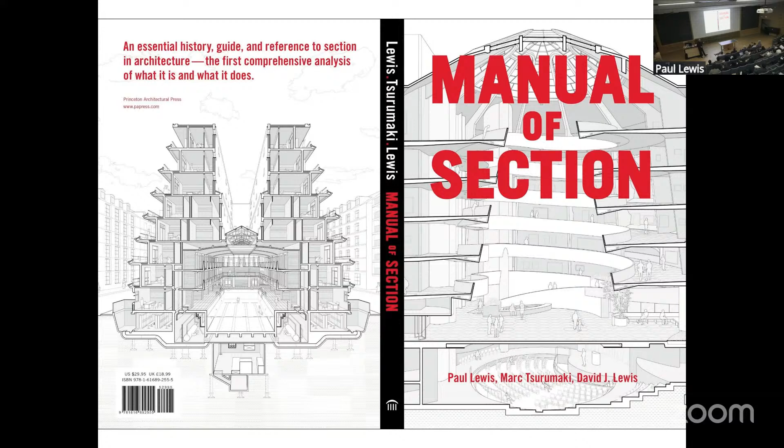And we also wanted to find a way that we could actually develop a kind of language or framework or a typology, if you will, of sections, so that when we as critics are involved in discussions, hopefully the level of conversation of the crit would rise above simply saying, you have a good section or you have a bad section, but what qualifies and what differentiates a section? Why do we claim that a particular section is interesting, and why do we claim certain sections are uninteresting?

In the process, we explored ways of looking at buildings through a combination of section and perspective. We really like the fact that it both looked at an abstract cut, something that was invisible, the measurable section through a building, but at the same time also allowed you to inhabit the view through the perspective. So it was both abstract and embedded at the same time.

It was painful to do these. It's very time consuming to do these drawings, but I think it's been a fruitful book, and it's been translated into I think 6 or 7 different languages. So we've been really pleased with the impact this manual of section has had.

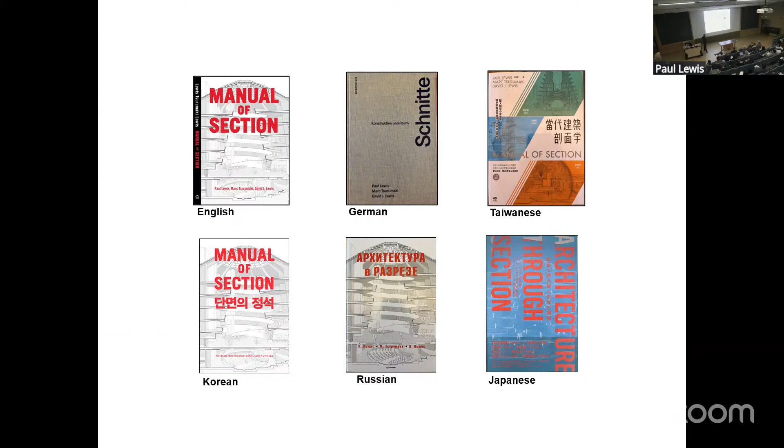I would argue that our more recent book, Manual of Biogenic House Sections, would actually be a more important book, in part because we moved into the question of the materials that are used to produce buildings. And particularly in the light of climate crisis, in the light of a crisis of toxicity, one way that architects can engage this issue is through the specifics of materials.

And so in some respects, we see this as a kind of paradigm shift away from 20th century modernism and its material basis. The book is structured according to 10 different chapters, 9 of which are bio or geogenic based, and the last one is reuse. And I'll start actually with the reuse because in some respects our office has always been involved in reuse.

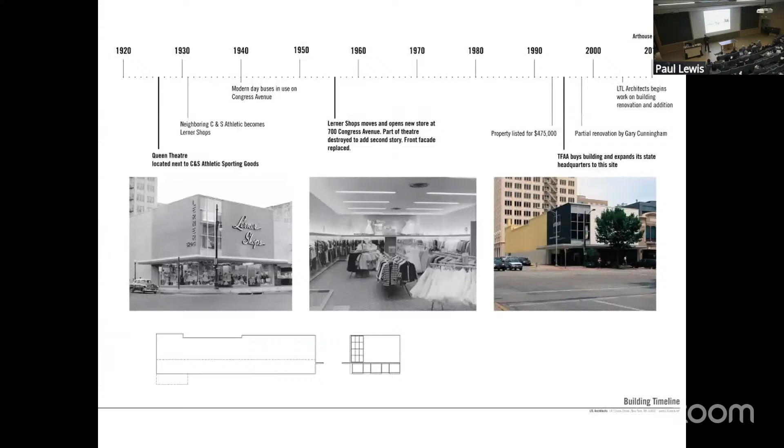The cliche with reuse is that the most green building is the one that already exists. I think it's a perfectly good cliche, but more importantly, it allows you to do other things. The act of working with an existing building is super interesting. It allows you to take a building that might have been, say, a theater that was then turned into a department store and now being reused as a contemporary art center, so that the trajectory of the design in effect affects how you go about even engaging with it, right?

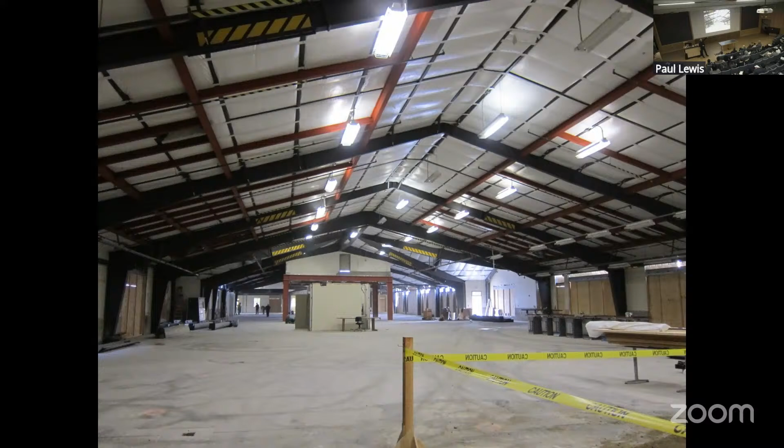Another project in California, we were asked to look at a maintenance building and convert it into an open office space. We would never develop an office building that would have this kind of column-free space. You just wouldn't do it, right? But this was the plumbers area. This was the area for the maintenance workers. This was, in a sense, all the trades that the university used to house on campus that they realized they no longer did because it was cheaper to actually go out and get them from outside of the context of the university.

But we were able to take this building, which was only about 10 years old, and reimagine it and take advantage of the fact that it has this column-free structure to deal with this new diaphanous ceiling. We perforated the whole ceiling with skylights so that it essentially had an atmospheric effect. Again, only a product of the fact that it wasn't a ground-up building, but in fact, reusing an existing building.

Or a museum in New York, Poster House, which was this through block space. But because it had to be a climate controlled museum, we in a sense had to do a building within a building.

This building was over 100 years old, so it was quite porous. There's no way it was going to have the humidity controls we wanted, but we didn't want to lose the quality of the space that was already there. So in a sense, we built a building inside a building.

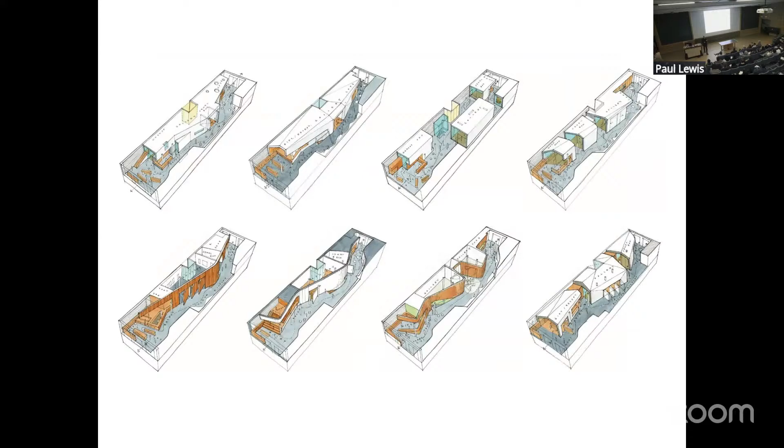The gallery was controlled. We went through all kinds of diagrams for how we might do that kind of ship in a bottle, and ended up with a much more simple version where we thickened the zone where we wanted the gallery and thickened where the public entry would be, and then started to look at some very simple geometric moves to sculpt that form so that we could end up with these two long lines that crossed the full block of the building and intersected precisely at the gallery entry.

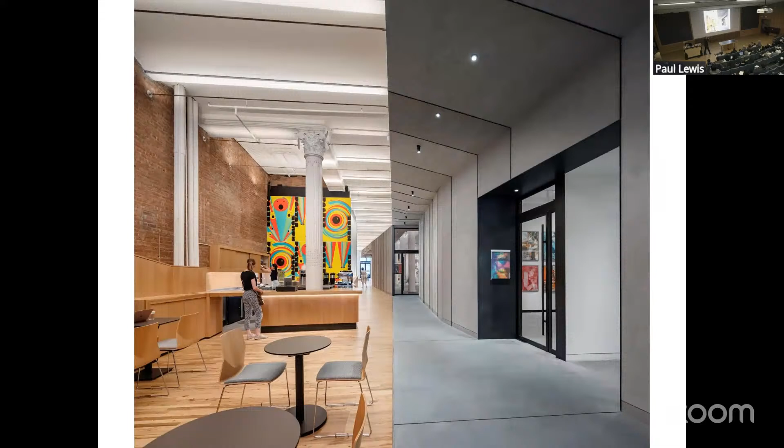Opposite this building within a building was a very long 230-foot piece of cabinetry that had to actually slope about 3 feet from 23rd Street down to 22nd. And so you end up with a project that almost feels like it has a split screen. On the right-hand side is the new building. This is all clay-based plaster. And then here you have the existing building that this is positioned within.

You still get these interesting transitions over that line. So here the seating, which actually is adjacent to where the coat room would be, transgresses that line, or the cafe is visible on one side. We like the idea that you would still maintain the presence of a promenade or a street, because a poster's natural habitat is the street. So why don't we hold on to that? Let's just keep that there, but still maintain the ability to have a gallery with full humidity controls.

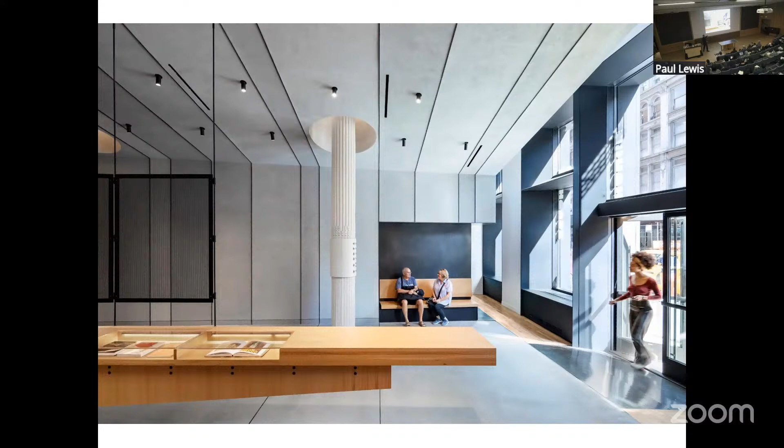The capitals were always super important to us. So even when we wanted to drop the ceiling, we would then sculpt the space for the capitals and illuminate them and almost put them on display in the thickness of the new building that was added inside.

A lot of reuse, and frankly, a lot of repurposing of buildings that we've been involved in has to contend with operational carbon. Basically, you have to make the buildings energy efficient. This was a 1960s laboratory at Cornell. And a lot of the work, frankly, went into reskinning it in a way that you had proper insulation, high performance, it would be self-shading, all the operational carbon questions that one tended to deal with, and use that to generate some of the form.

But one of the downsides of this is that we were not really engaged with the questions of the embodied carbon, or the carbon necessary to build the building in the first place. And that, in a sense, is the dominant shift within the practice over the last 5 years. We've been really interested in ways that one could intensify the agency of materials that sequester carbon in particular.

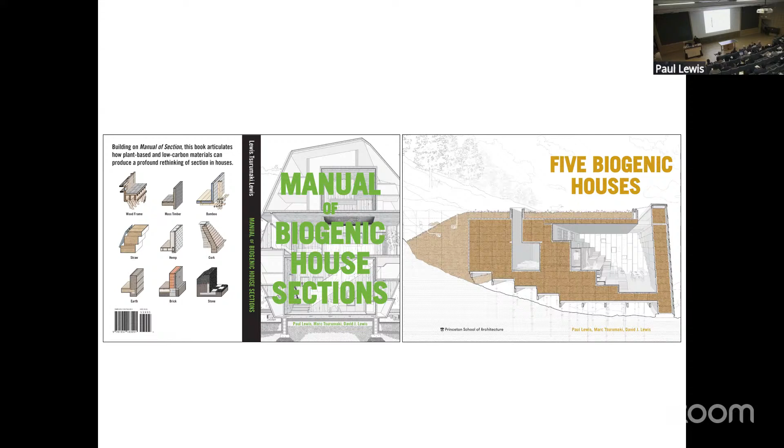And so what I'm going to present is really a mix between these two books. This is research into other people's houses that have worked with bio-based and earth-based materials. And then these are a series of houses that we designed using plant-based materials. This is all stuff you should know, so I'm going to go through it quickly.

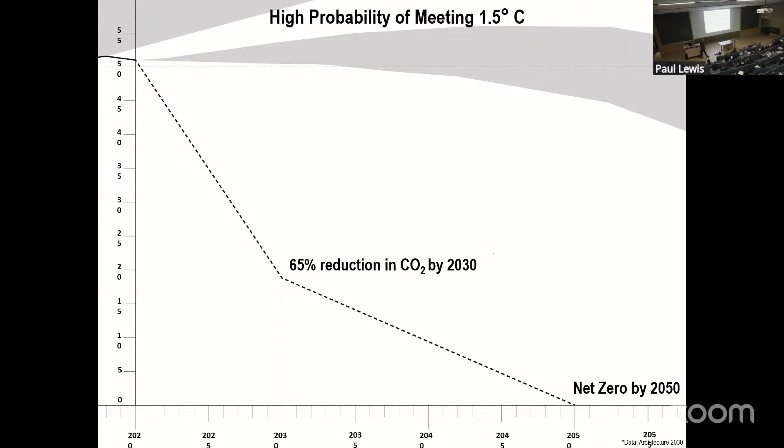But basically, the climate problem isn't going away, and our current trajectory is leading to a level of likely catastrophe. The argument, and these are not arguments we've made, but others, whether it's Architecture 2030, AIA 2030, or the Carbon Leadership Forum, is basically that we need to be reducing carbon drastically in 5 years in order to get to net zero by 2050. It's not happening.

And everyone's heard this stat that the built environment is responsible for about 39 or 40% of global carbon. Of that, a smaller percentage is embodied carbon, but the issue is that embodied carbon has not been getting as much attention until the last couple of years. Operational carbon has been dominant within the architecture world, and yet if you look at a new building that gets built, about half of its carbon emissions between now and 2050 are going to be because of the materials up front.

And that gets even worse if you're looking at a high performance building, not surprisingly, because the fact that it is so efficient operationally means that even more of the percentage goes to the embodied carbon. And that carbon is bought up front, so it takes a while.

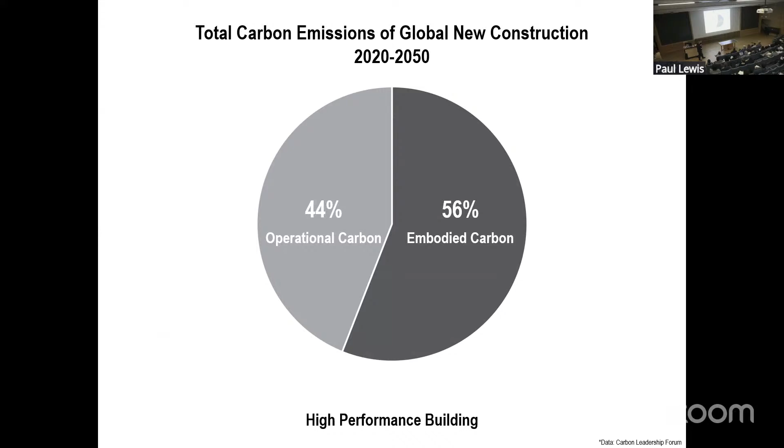It takes a number of years before that operational carbon is released to the atmosphere. So if we're trying to contend with carbon problems, we have to deal with embodied carbon. There's an argument that has been made that we should stop building, we should just reuse. That's the best way to move forward. The problem is it doesn't deal with the fact that there's global demand that's pretty extreme for building, so we can't reuse our way into the future.

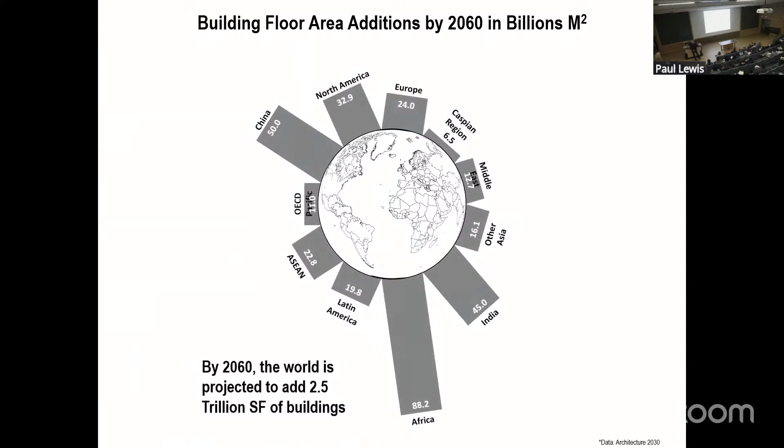There has to be a model that looks at building, but building in a way that has a better relationship to the environment. And in particular, this means that there's going to be a paradigm shift. And this is what frankly gets us fairly excited. That in a sense, whether we want to admit it or not, we're still living in the legacy of modernism, legacy of concrete, steel, and glass. Carbon intensive, the idea that everything can be global, that architects are ultimately kind of positioned as consumers.

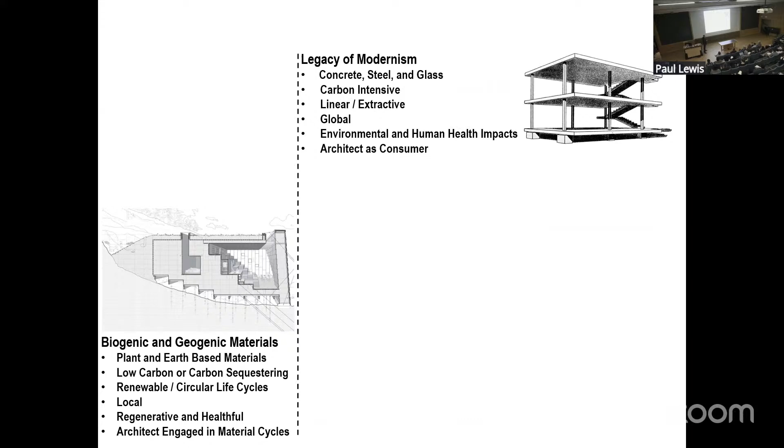We specify products, right? And we're very excited by the prospect that architects can essentially work much more as kind of engaged participants in larger life cycles around the materials, and that these materials are predominantly plant and earth-based. They're low carbon, they're local, they're renewable, we're concerned about their cycle. We're not just kind of specifying and then using and getting rid of materials. And we know that not all materials are equal.

So on the upper level, to the right is the carbon intensive materials, the glass, steel, concrete, and everything that sequesters carbon, not surprisingly, uses photosynthesis, plant-based on the lower left. So how do we use this as a basis for design? In other words, the purpose of the book was to make legible buildings, and in particular houses that have used plant-based and earth-based materials as being generative within the architecture, not positioning them as substitutions for existing materials, but actually as generative for the very thinking of the building.

So one of the keys for us within this book is that there were 55 houses selected from around the world, and each of them had to have a level of architectural invention. There had to be a level of seduction. In other words, it's not simply about working with these materials and building banal buildings, but in fact, what are the possibilities that are released by these materials? And more importantly, making sure that that seduction, which is one of the key things we bring to the whole dialogue about the built environment, is still at play, and it's germane and relevant to the very materials that are being engaged.

One of the critiques of the book that we have is that we shouldn't be doing houses, and we totally get that, right? One should be looking at housing, not houses, and that's acknowledged up front. One of the reasons why we dealt with houses is, one, that the scale of the house section was sufficient that in the format of a book, you could actually read the materials. So that was key. The second is that when we wrote the book, there were not a lot of housing projects that use these materials. That's been changing, but it was very difficult for us to find, say, a straw bale or a straw-based housing project, let alone 5 of them.

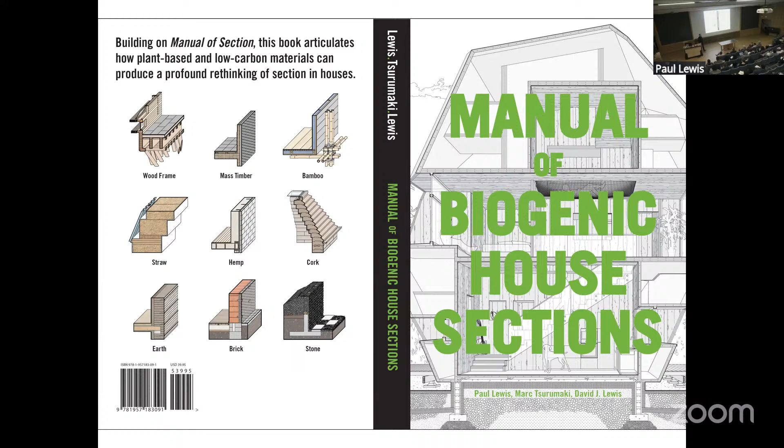But we could find houses. So houses, which have always been the site of architectural experiments, have continued to be that way. And so we were able to capitalize on the fact that we could find built examples of all of these materials with multiple examples in the form of houses. I should say that all of the houses within the book are small, most are less than 1,000 square feet, which is important, and they all have inventive sections and an architectural ambition.

Okay. The book starts with a critique of the overscale American single-family house, not just kind of tracking its carbon and where it comes from, but also just making clear that this building has gotten quite big because of the cheapness of the materials, the petrochemical materials that are used to make it. Houses used to be about 1,000 square feet in 1950. They're now 2,500 square feet. And that's made possible because all of these materials are essentially very inexpensive. So you can build a larger house because you can get materials that are quite cheap.

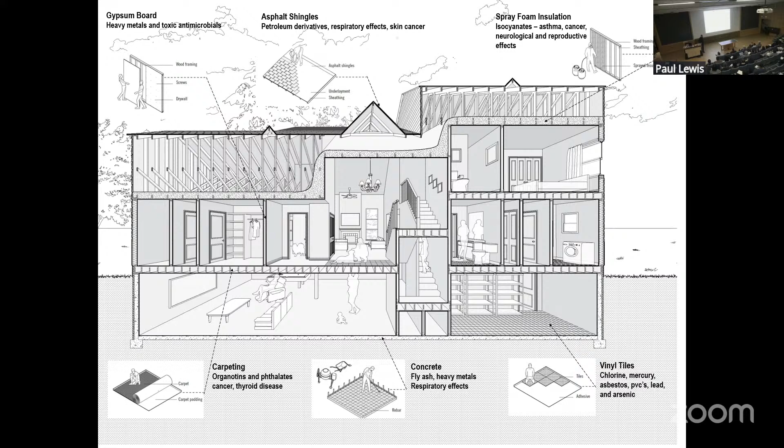But these materials are not great, and I won't go into them at length. Others have done that. Parsons Healthy Materials Lab has a great resource on the health of building materials. But these tend to be materials that have a limited lifespan. They tend to be toxic. They're sites of fabrication. They tend to off-gas when they're in the buildings.

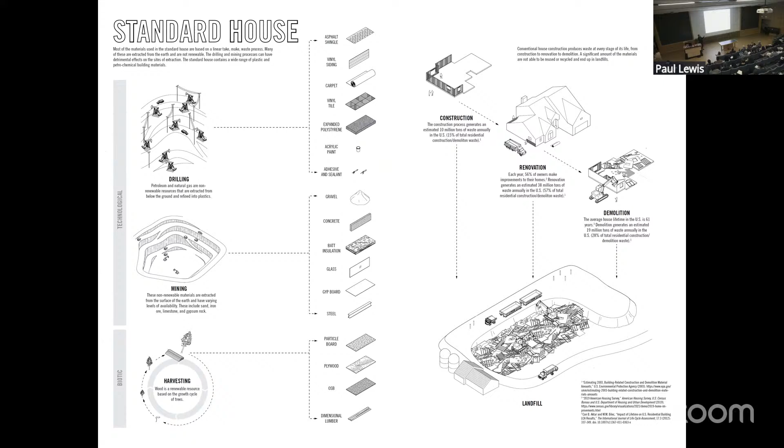And at the end of life, they lead to essentially landfill. And those lives are not at the point where they've exhausted their usefulness, but they've tended to no longer be fashionable or no longer be economically the right scale of building for a particular site. So demolition occurs not because a building has deteriorated, but because it's no longer valued. And at the end, of course, we get excessive landfill. So there's a kind of crisis of carbon, but there's also a crisis of toxicity that are combined here.

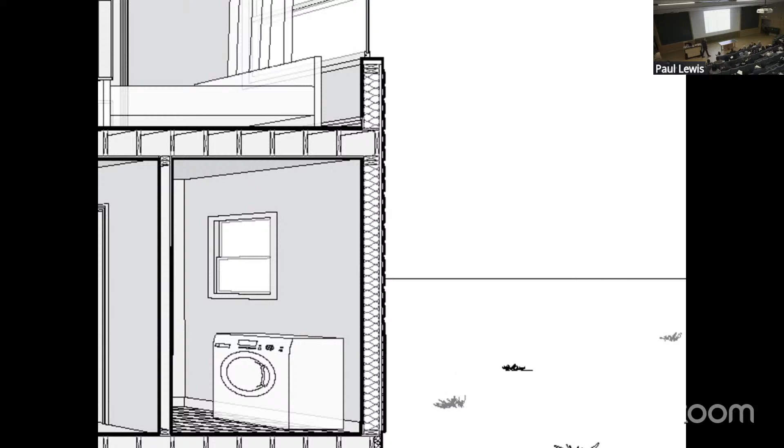The other thing that is very useful for architects to think about is that when we get obsessed with buildings, we tend to care about structure, and we care about the interior finish and the exterior finish, and there's not as much attention paid to what else goes on within that wall. And what takes place within that wall is pretty astounding. There are multiple layers at play here.

Anyone who's specified and developed the wall section starts to realize there's anywhere from 6 to 15 different layers. They tend to be all pretty lightweight. They're thin. They're usually single performing. There's lots of them. And they often set up this very strict binary between the exterior and the interior.

And to be honest, architects don't tend to engage in the full depth as a design issue, right? We tend to mostly care about what it looks like on the inside and the outside, and maybe the shape and form that it takes, and perhaps its performance criteria. But how we get there is not as much on our radar as it should be.

On the other hand, what we look at within the book is the possibility of thicker walls, of multi-performing walls, of walls that might be made out of a single material that does multiple things. And in a sense, embracing things that were rejected by modernism, say thickness, for example, or the idea that something might have to be maintained.

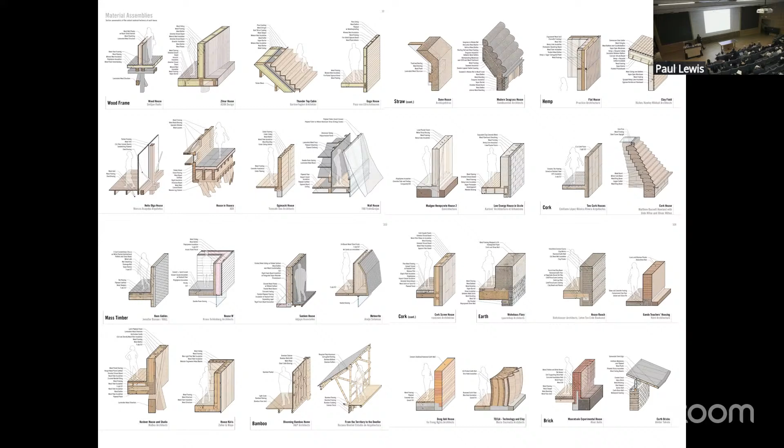Every building has to be maintained, but somehow we're deluded into thinking that we're making a maintenance-free building. So bringing in maintenance as a necessary component to the project, and really rethinking the very material palette of what we work with. So I'm going to present these in sequence, going through some of the examples.

Within the book, what we do is we always present the material, we present the carbon associated with it based on publicly available databases. There's very little that can be super precise about carbon. It's an abstraction, it's a rough guide, and that's another whole problem, the whole number counting, but there is a relative scale, and so we wanted to give a rough range of where these materials fall.

We follow that page with a page that looks at the life cycle of the material from its growth to its use in buildings to its end of life and how it can be developed into a circular model. And then the next page looks specifically at how one goes from a plant to a useful building member, if you will, and the key steps in that transition. So in a sense, how does one translate from the field to a form, if you will?

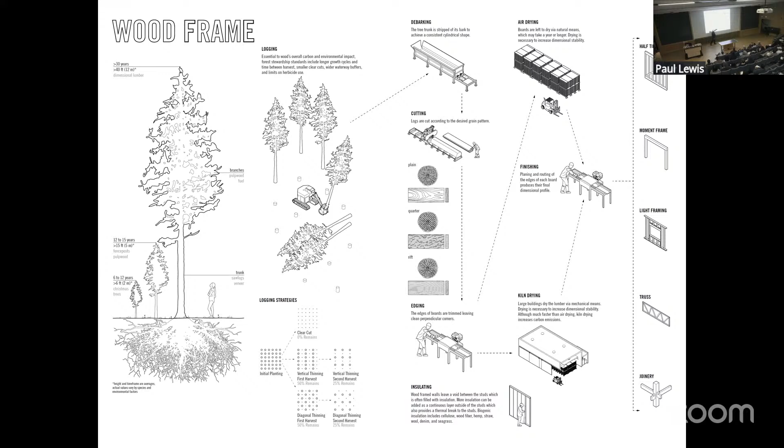There are usually about 5 or 6 examples of houses within each chapter. Within each of those, we wanted to feature not only the exterior view and the interior. Not many of these are canonical. In fact, very few are well known, which is actually really nice. Most of them are actually from the last 10, 15 years. We wanted to make sure there was an example of the project under construction, as well as our custom drawn cross-sectional axons to reveal the floor plans.

And then the next page has the cross-section perspective that allows you to see how it was made, the scale of the members. We try to think of this as a kind of visual scholarship where we try to be as precise as possible with all of these materials and how they come together and the spatial qualities that come across from the project.

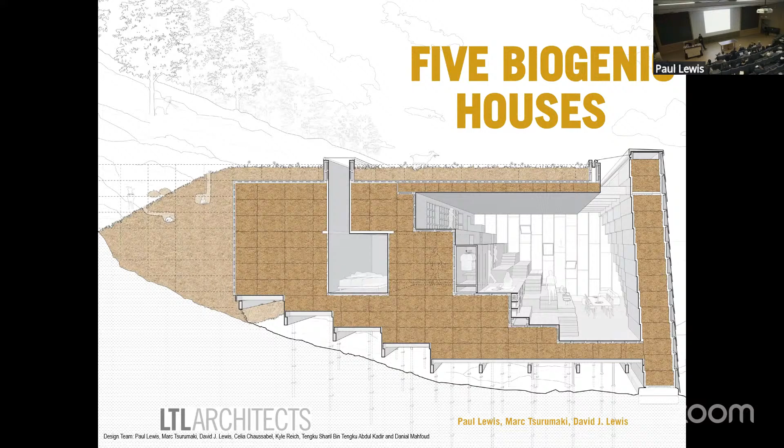As I mentioned, after 5 years of doing this, maybe more like 3.5 years of doing the book. And I should mention Adam Ainsley was instrumental in the start of the book. And it took a while, and we realized that we actually wanted to design our own houses. So we ended up developing about 5 houses that were our take on if you could develop innovative architecture with these materials, where would you go? So I'll present some of those as well.

I should mention that Kyle Reich, who works at LTL now, helped install the exhibition.

He was instrumental in doing this book, as was Celia Chaussabel. There were many people involved, but the two of them in particular played a heavy role in advancing these projects. So a shout out to both of them, particularly Kyle for making the exhibition come together.

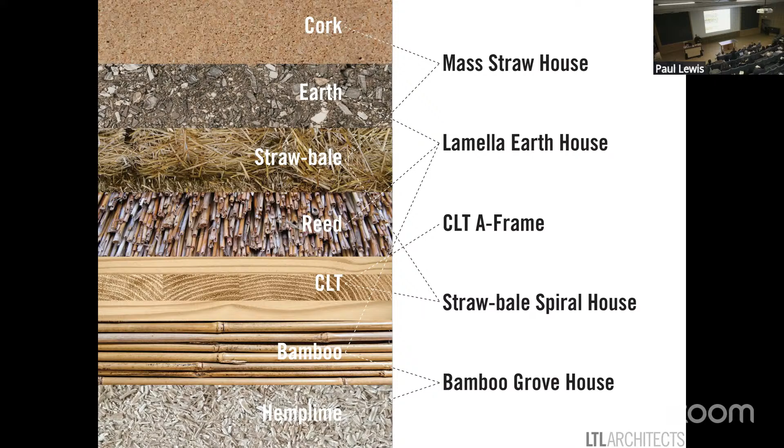Okay, so these houses usually involve a couple of different projects, different materials. We don't see materials operating in isolation. It's often the hybrid that becomes interesting. All right. So mass timber. Mass timber is the kind of poster child for plant-based materials. It's much more advanced than many of the other materials I'll be talking about in terms of manufacture, code, acceptance from contractors, et cetera. But it's not going to save us.

And let's be clear about this. Mass timber has its problems, right? It's better than steel and concrete, but in general, the question about its greater benefit is still not fully resolved. What I mean by that is that if you look at how long it takes for a tree to grow, the disturbance of the soil, even with good forest stewardship, you still are maybe not getting a net gain by the sequestering of the carbon because of the loss of carbon to the soil and to all the parts of the tree that don't get used within the building.

So if only half of the tree gets utilized for mass timber, you have the other half that, unless it's properly incorporated, is going to basically biodegrade. So you're left with basically a wash, right? And so mass timber has some problems.

The downside I've witnessed in schools of architecture is with Rhino models, where you used to ask a student, what is this made out of? The response is usually, it's concrete and glass. I'm like, okay, concrete and glass. Now, if you ask a student what their project is made out of, they'll say it's cross-laminated timber. So there's this weird way in which it's simply a kind of substitution into the generic world of Rhino. And that's a bit of a problem.

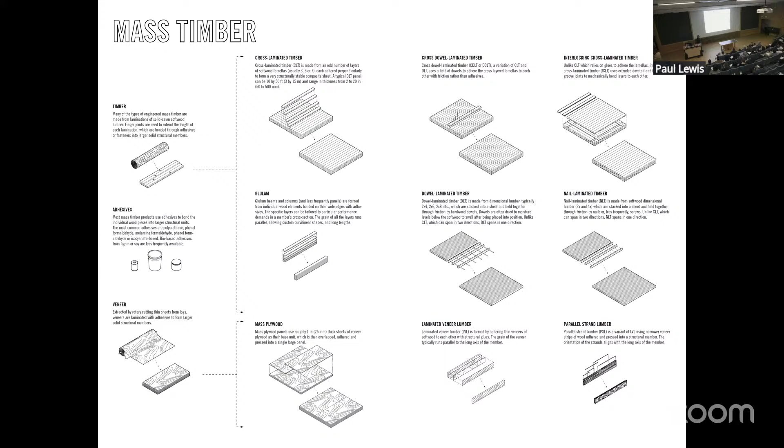The other thing, and I kind of hinted at it with my critique of the role of Rhino, is that often mass timber in the construction world is simply replacing a slab and beam approach, and that seems to be a missed opportunity. One of the criteria for the book was what houses are really using mass timber in ways that are specific to the opportunities made available by mass timber.

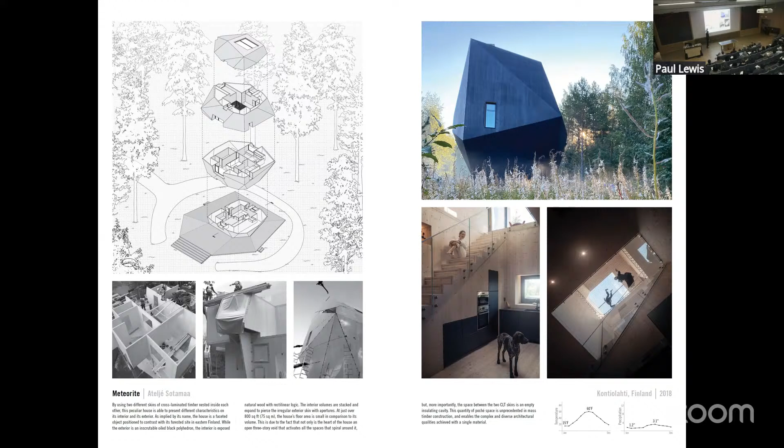So Jennifer Bonner's house, Gables, is clearly only possible because of the unique tectonic and structural capacity of this millable sheet good to form these complex roof lines that would be very difficult to do with a whole series of smaller 2x. Or the Meteorite by Ateljé Sotamaa is in a sense just 2 layers of mass timber. The faceted form is a product of being able to mill mass timber at a high level of precision. And as you can see in this section, the project is just 2 layers of CLT.

An interior layer forming a rectilinear inhabitable space, a faceted outside, and then very large interstitial spaces between, which are effectively an insulation layer. There is no insulation, no cladding, no interior finish except the CLT, and the only cladding is a black stain added to the outside of the mass timber. So it's really interesting to imagine how you could start reducing some of these other layers by pushing mass timber to do more than it would if it was simply replacing the stud wall.

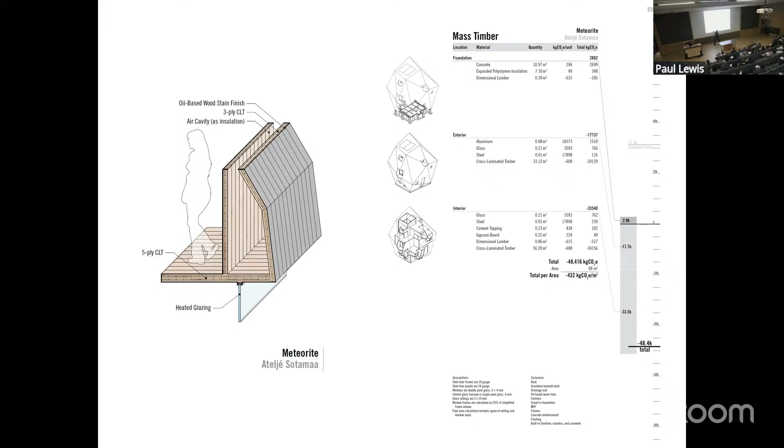The other thing you start to get is a fairly high amount of carbon sequestration, 48,000 kilograms of CO2 equivalent. All right. So with a house that we called the CLT A-frame, we were interested in what would happen if you didn't cut a CLT blank into all kinds of different pieces, but actually used the entire thing. What happens if you took these very large pieces of material, 10 feet wide by 50 feet high, and just let those be the generator of the geometry for a house.

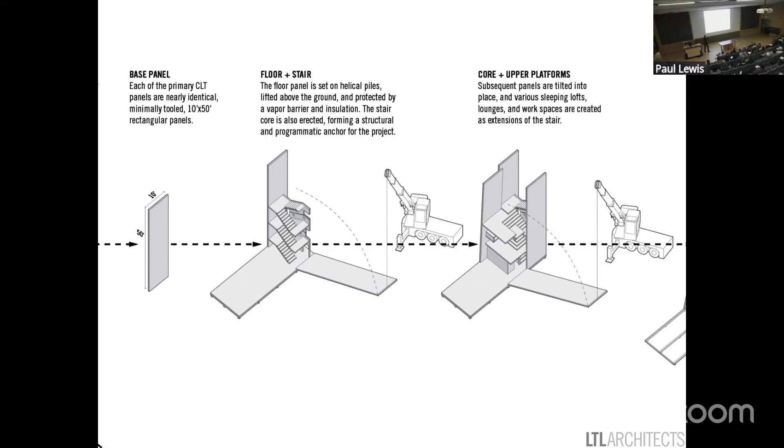So our strategy was to say, okay, at the back of the house, let's let these things be parallel to each other, stand upright. They'd be supported by the stair that would kind of stiffen that back portion. And as you move to the front of the house, these panels simply kind of tip toward each other, forming this extremely high building, 50 feet high to the top of the wall.

And that also allows you to start to inhabit the space of that kind of roof deck up within the trees of this house anticipated for the Pacific Northwest. On the inside, of course, you get CLT as the finish, and cantilevering into this very unique proportion section would be the sleeping lofts and the other rooms. So everything takes place within the space made as a product of the geometry of the CLT blank.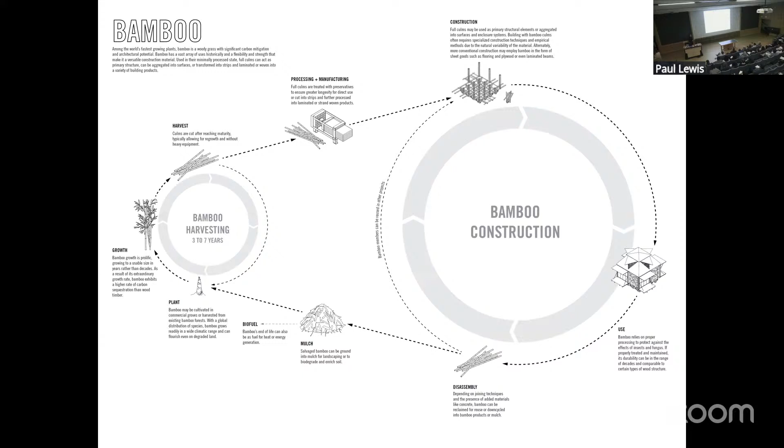Okay. Bamboo, unlike mass timber, is incredibly fast growing. Bamboo tends to be harvested after about 5 years of growth. It has greater capacity, both in terms of tensile and compression strength than wood, and it starts to rival actually concrete. It grows extremely fast, and one of the nice things about bamboo is that it is not clear cut.

You basically go in and remove 1/5 of your bamboo forest at any given time because it's a 5-year growth cycle. It constantly regenerates itself. You're not disturbing the soils. You're not disturbing the roots, and essentially it's constantly being cultivated. The downside to bamboo is that you often have to cut it up and re-glue it into all kinds of different smaller pieces, so the adhesives become a real problem.

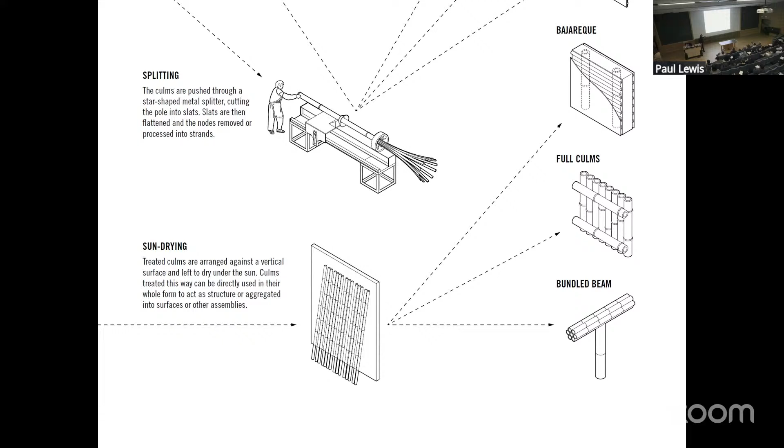Although one interesting thing is to look at how the culm itself could be used as the point of departure. You get into the issue of non-standard, right? So the 2x4 is a great way to standardize construction. So a natural material could be seen as being consistent. Culms are all unique, but there are ways to assemble them that take advantage of their density and bundling them to produce things that are more self-similar, beams or columns.

So this particular house actually used the culms to cross-brace the house through a series of ramps. So in a sense, the house has no stairs, it just has a continuous surface moving up it. We really like the fact that the structural stabilization of the culms actually generates a very different inhabitable space for a house.

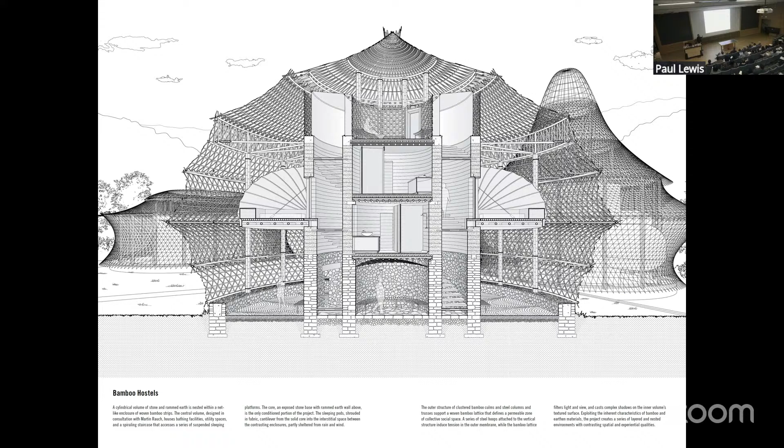Or in a project by Anna Heringer, here the flexibility of the bamboo allows for a really unprecedented exterior skin, providing a loose atmospheric effect around the rammed earth and interior. This is a youth hostel. It's really an extraordinary building that is only made possible by, again, the flexibility of the individual bamboo columns.

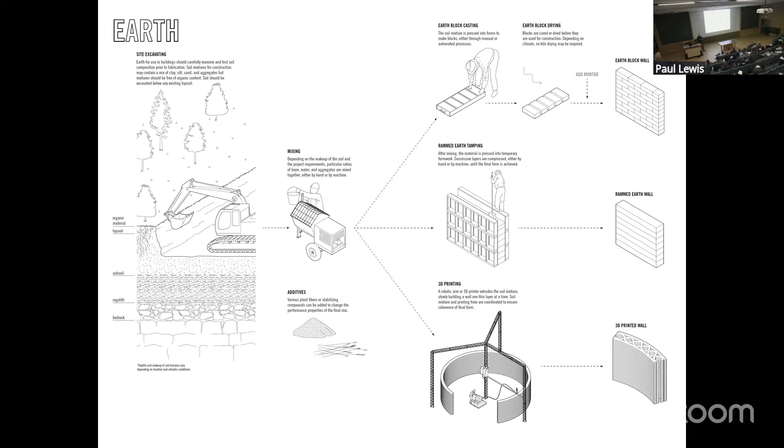All right, shifting to earth. This certainly lacks some of the capacity to work in tension, but it's incredibly good in compression. It's been around for a very, very long time. Often when one thinks about earth construction and rammed earth, it uses a fair amount of Portland cement. So one of the questions here is, can we still work with clays as the binder? One of the fascinating things about working with earth is that it can actually be a liquid that then gets translated into a form. So the ability to print it becomes really interesting.

And just a couple of the examples, this is a house that actually combines earth and straw to make a cob wall. This is about 32 inches thick, and as you can see here, was placed as a mass on the wall, and then simply carved with a shovel. And you get this really interesting contrast between the roughness of this earth wall and then the wood ceilings and floors. The floors themselves are filled up with straws and insulation with large projecting eaves to protect the earth from erosion.

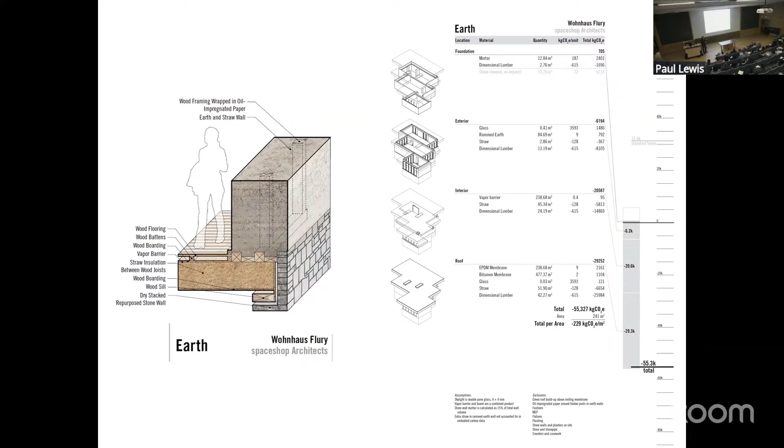And in the tectonic detail, you can see that the earth is actually not load bearing in this case. It's simply the interior finish. It's the exterior. It's the insulation. And it forms the enclosure for the building. It absorbs humidity and releases it. It dries itself out. And the fact that it has a fairly tall foundation and the overhang keeps it from being damaged by water. An amazing house that just simply uses the mass of the cob wall.

A different model that's built into a series of blocks. These are earthen bricks, 4 inch by 6 inch by 16 inches in Burkina Faso by Kéré Architecture. And I think there's something like 12,000 bricks that were made on site, and they were used to form both the walls, but then also these simple arches that then were protected by a small amount of metal, right?

Reusable corrugated metal that ultimately channels the water to the tops of these walls. And that really starts to form the geometry of how this stuff is all linked together, essentially using the building to harvest water and place it in an underground cistern. Really interesting project, fairly simple, but the cumulative effect is pretty impressive.

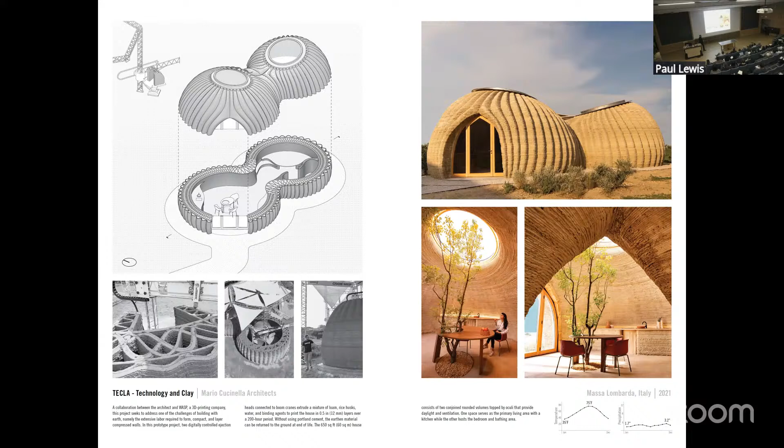As I mentioned, you can 3D print earth, and this is a project outside of Bologna where half-inch layers of earth. There's no Portland cement added to it. It's simply a clay-based earth. Producing roughly 30-inch thick walls that were open and filled with rice husks for insulation. Really interesting project that imagines the possibility of 3D printing without having to resort to a lot more concrete.

So with the Lamella Earth House, we were interested in how you could take bamboo and the efficiency of it, the structural capacity of bamboo, and develop a kind of lamella structure using 8-foot lengths of bamboo, and then inside that larger scale volume place a kind of earthen structure. So the lamella structure is really taking the same 8-foot units and a single detail and basically expanding it out so it forms a continuous kind of dome, if you will, or extruded arch.

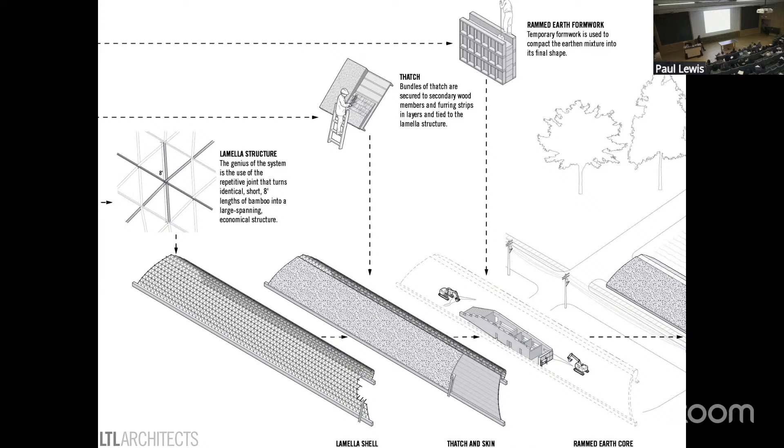One side of this was then clad in thatch, and the other side with a kind of translucent plant-based polycarbonate, which really gives you a greenhouse, so a kind of interstitial layer between the outside and the inside, being able to use for plants as seasons permit. But more importantly, provides a buffer zone to the extremes of the outside climate for then what would be the inhabitable interior, which is made out of the very soil in which the house is embedded.

So in a sense, you get a house that's inside of another volume. This volume is kind of playing the role of the barn, but you still get the house within the barn, if you will. And we like the idea that one could start to imagine different models, and in this case, a kind of farm-based building type hybridized to start to move into the world of the domestic.

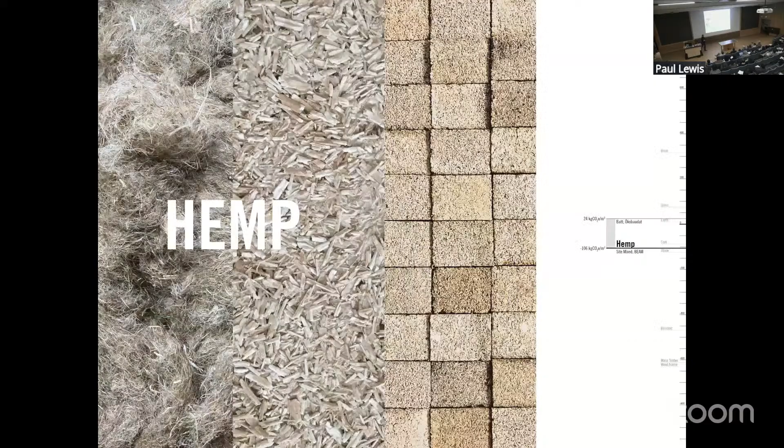Okay, so the next three materials I'm going to talk about to conclude the lecture are all insulation. And I know very few studios start with insulation as their point of departure. It just isn't where you go. But it is amazing stuff, right? And it's also the source of a lot of carbon. And frankly, a lot of petrochemical insulations are on the market.

Most insulations burn horribly. So if you ever want to have some fun with XPS, just try to set it on fire. It's going to go up. It's going to leave incredibly toxic residue in its smoke. It's just really nasty stuff. It's high performing, no question, in terms of its resistance to heat movement, but most petrochemical based insulations are pretty unpleasant. And if you've ever installed fiberglass insulation, you know what I'm talking about. Any material you have to wear a hazmat suit to install should be a warning sign that maybe this isn't the right material for what we're doing.

Okay, so hemp is a fantastic plant. It grows super quickly. It can be harvested sometimes twice in a year, depending on the growing cycle, so about 2 to 4 months. It tends to require very little water, no fertilizer, limited if any pesticides. It often rejuvenates the soil. The use of hemp has been limited by its association with the psychoactive THC, which is a different species of hemp. But because of the war on drugs, basically hemp was eliminated from the US until around 2018 or 2016, the Farm Bill that came through that made it legal to actually grow industrial hemp again.

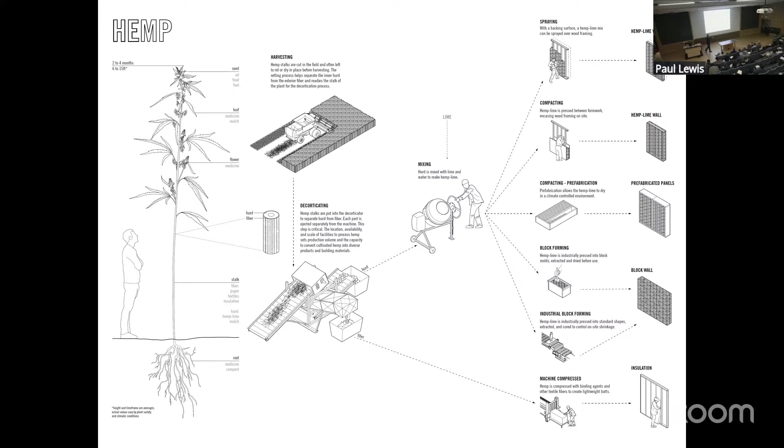Hemp itself has to be decorticated, so you have to separate the fibrous exterior shell from the inside hurd or shiv. The shiv actually works very well as an insulation because it has a cellular structure that captures a lot of air, whereas the fiber can be used for fabric, paper, and frankly, it could also be used for a batt-based insulation. It can be formed into a wall on site, combined with lime, can be used to make blocks or be used directly in a project.

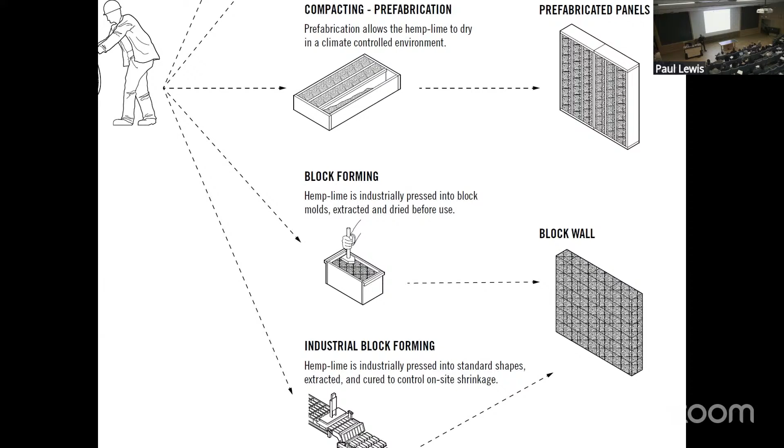There's a term hempcrete that refers to the combination of lime and hemp. It's not the best term because it suggests that it has concrete-like capabilities. It doesn't. It is insulation. It is not structural, but it is resistant to rot, to insects, to fire, et cetera, and performs extremely well. I love cork, but cork is not scalable. That's the biggest problem with cork.

There's only so many places in the world you can grow cork. It takes a long time for the trees to grow, and it takes another period of 10, 15 years before you can harvest the cork off the tree.

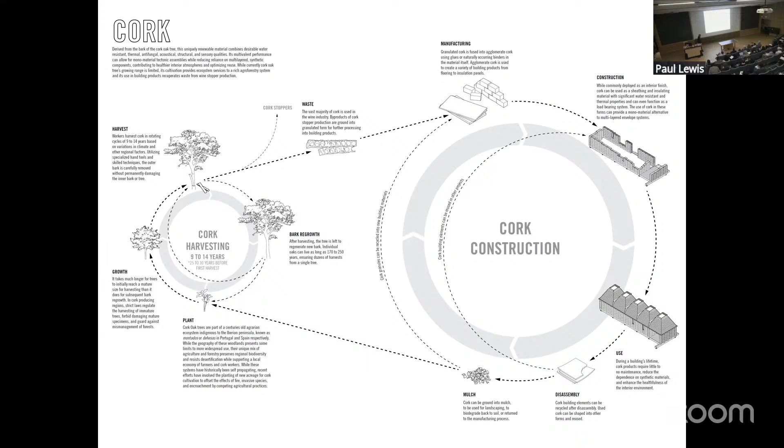It is an amazing material. It is able to work as a cladding. It's able to be structural. It's insulative. It smells great. It works acoustically. It's a fantastic material. It's just very hard to scale it because it tends to only grow in Spain and Portugal, and often, as it's used in architecture, it's the residue of the cork wine stopper industry.

There's initiatives to try to recycle more wine bottle stoppers to turn them into architecture, which may increase the quantity of cork available, but still we're limited. You can't scale that much with it.

That being said, just to show an example of an incredible house built almost exclusively with cork, there's a cork house built with 1,268 CNC milled blocks. It's the insulation, it's the interior finish, it's the exterior finish, it's the structure, it does everything, right? And it's corbelled up to produce the enclosure. There is a wood ring beam that runs around to help stabilize the blocks together, but it's effectively an all cork house and is really quite beautiful in its own right.

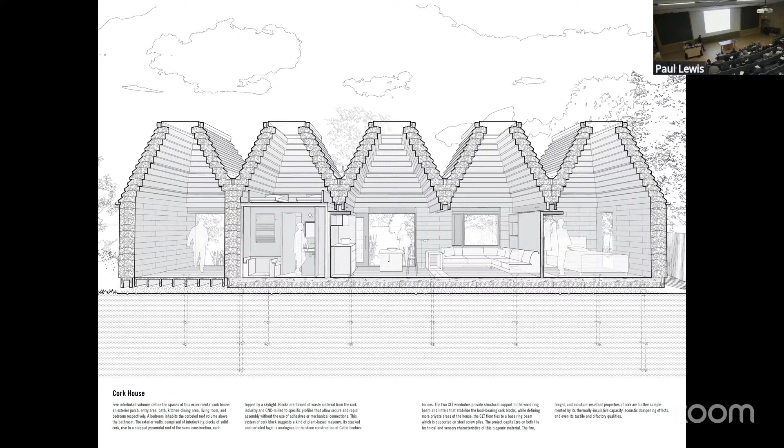Okay, but there is one material that is scalable, that is available everywhere in the world. The amount of carbon stored in straw, some argue, is equivalent to the carbon released by the concrete industry or by the country of India. So there's a massive amount of carbon being stored every year just in the agricultural waste of the cereal grain industry. So we're talking about wheat, barley, rye, et cetera.

The stalks, after you take away the seed where you get the flour and the cereal grain, the stalks that are left, which have very limited, if any, nutritional value, that material sequesters a massive amount of carbon globally. And the question is, how do we reuse it? How do we actually store it into buildings rather than extracting carbon through carbon sequestering technologies that bury carbon into caves through multi-million-dollar ventures? We have something that's actually doing that. The question is, how do we actually use it better in our buildings?

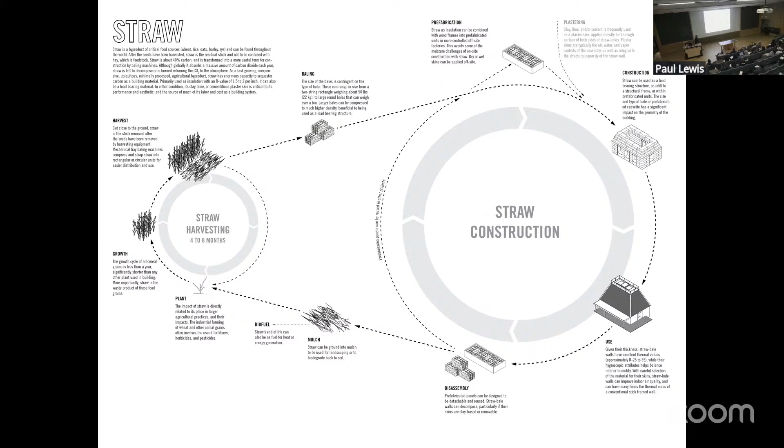Straw has a long history of being used. Actually, I shouldn't say a long history, a short history, but long in the terms of the United States, because it's been around since the late 1800s in Nebraska. Straw bales were used to build buildings. Typically, you're looking at the need to work with a baling system that is really not designed for architecture. It's designed to get the stalks off the field. So it's actually a very bad building product because, talk about non-standard, these bales are not contingent upon how they're being used architecturally. They're about the machine to get them off the field.

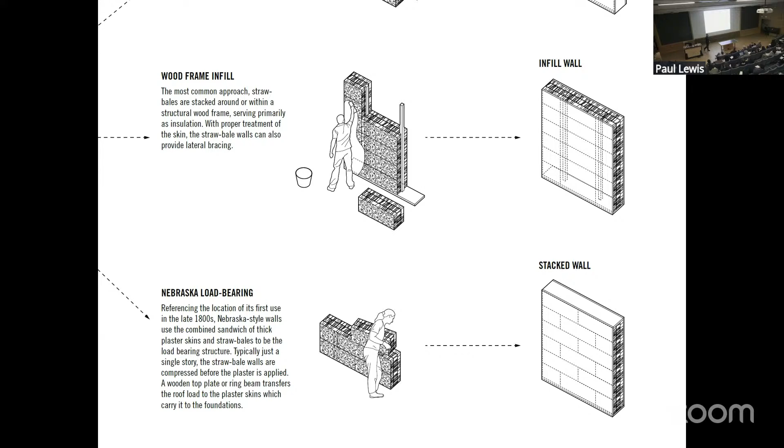You can use straw within the context of a wall, whether it's placed within an existing frame, or it can be stacked up and be load-bearing using the plaster as your structural skin, reinforcing and really carrying the load. Or you can look at putting it into a prefabricated assembly. Again, the interest in straw is how it can also be structure and insulation simultaneously. And there's also the possibility of thatch, which is underdeveloped in this country in particular.

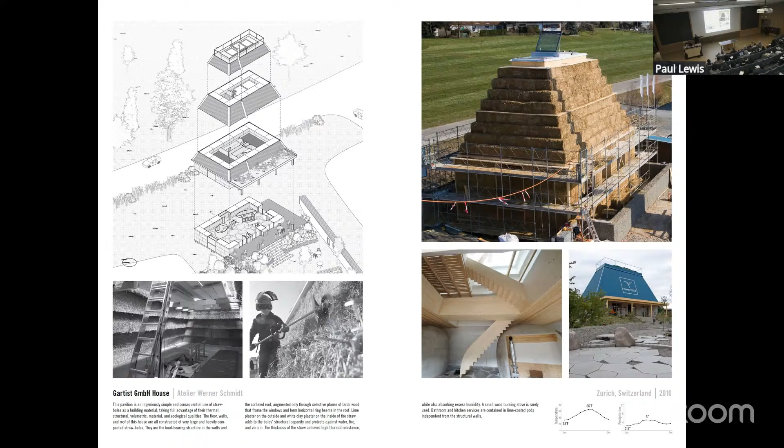Just a couple of examples. This is an amazing project that used jumbo straw bales. These are 30-inch by 60-inch by, I think, 150 inches. They weighed about 700 pounds each. These bales were stacked up and form, similar to the cork house, if you will, in geometry. It's basically nothing but straw. It's the load-bearing surface. It's the insulation.

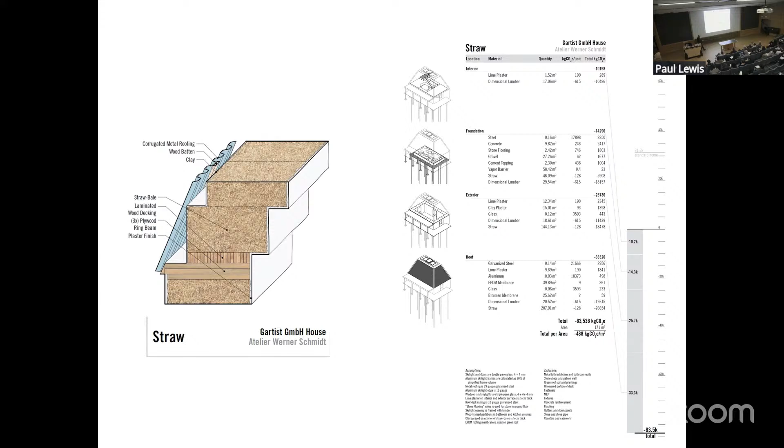It has a skim coat of plaster on the inside and the outside to protect it against insects and moisture, but is otherwise a completely straw-based building. And it sequesters a massive amount of carbon, something like 488,000 kilograms of CO2, or 80,000 kilograms of CO2, 488 kilograms per meter squared.

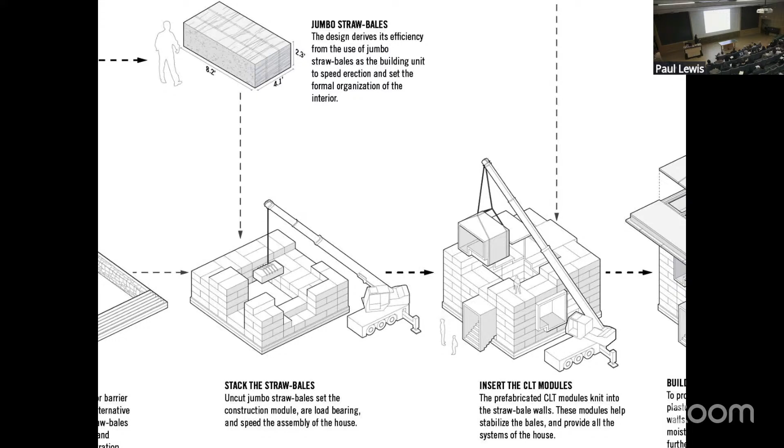All right. So we were really interested in this idea of thickness and how much straw could you actually use in a wall? Could we actually make our walls so thick that they could become the rooms themselves? So this project said, all right, could we take CLT as a way to make a kind of frame or box and do those as a prefabricated unit and insert those into the voids left within what otherwise would be a solid mass of straw? So in a sense, you would get these CLT units being dropped into the voids left from removing some of these straw bales.

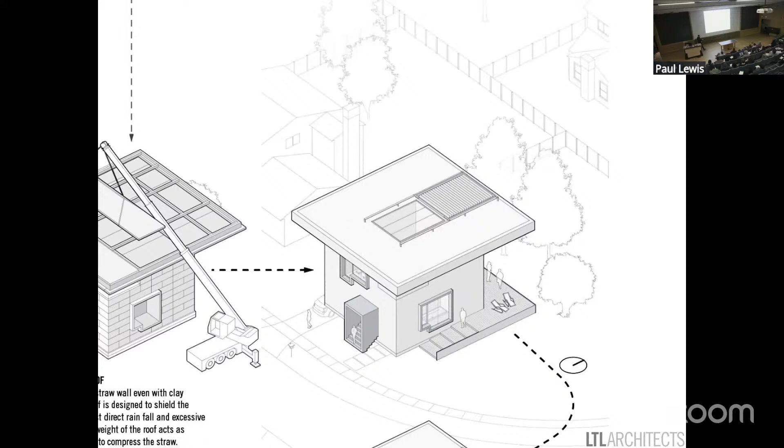There'd be a wide, horizontally expanding cantilever roof to protect the plaster skin from erosion and from moisture, and a central skylight with a retractable louver to bring light down into the thickness of the building. But really the project was this, the idea that you start to embed your rooms into the walls, right? So that you start to have a Loosian space that would unfold, spiral up through the project, but basically linking from room to room, with this incredibly thick wall now working its way into the building.

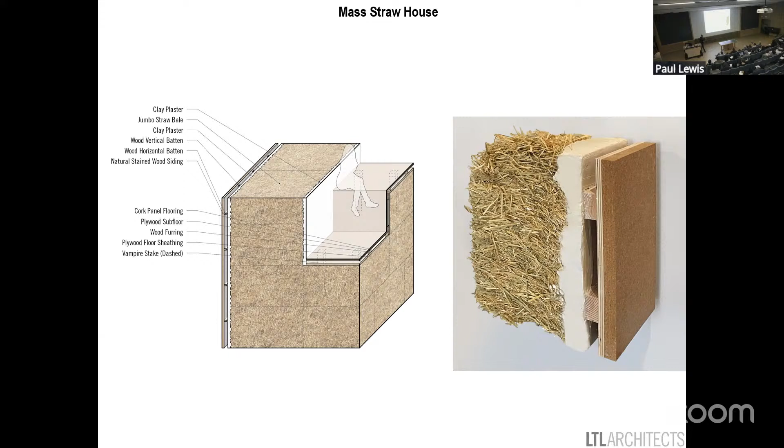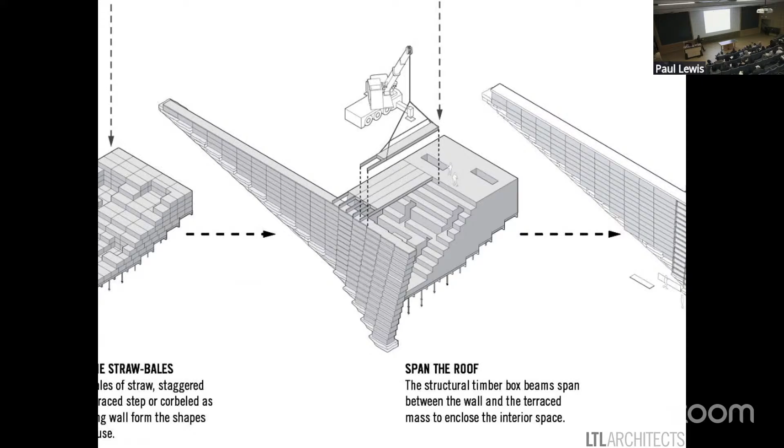One was a wall that would follow the topography of the site that would slightly pull away as it hit the house. The other was this thickness of straw, similar to the previous house I showed, with the rooms carved out from in it. But these two then would be linked through a series of structural timber panels that were also filled with straw that would tie these two systems together. The straw would then be clad with a membrane and more straw being put on top so it could blend into the site itself.

There's often a question, won't animals eat your building? Animals don't like straw. It's not hay. Hay is a vegetable. Straw has little to no nutrients. But we like the idea that, yes, if an animal wanted to eat our building, that would be okay. We just build it into the logic of the project.

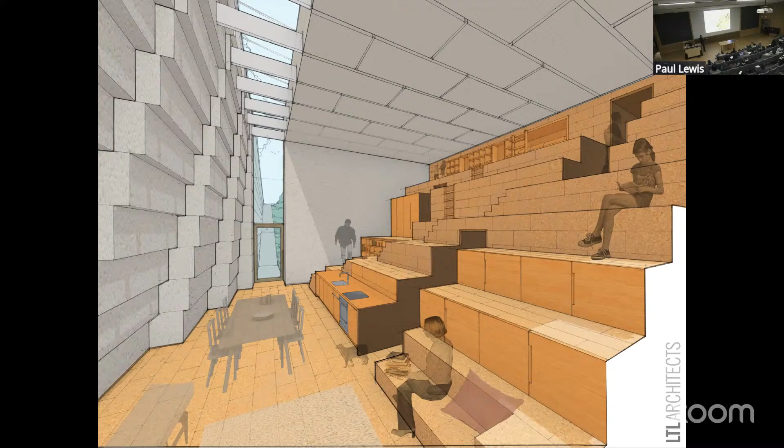And then you'd end up with the bedrooms, places where you need privacy, actually carved into the thickness of the straw, whereas the social space is really set out in between these two straw masses. So you get the public space, the dining room, the kitchen, the living room, and then forming a set of steps that allows you access into the private rooms, the bathrooms and the bedrooms carved back.

And most importantly, this thing was mostly solid, right? This is a house that's more mass than it is space, and it sequesters a massive amount of carbon as a result. We also really like the idea you have these incredibly separate acoustic rooms that might have skylights, and again, the ability for animals to start to become part of the house as drawn in the section.

Okay. A couple more experiments with straw that we've been working on the last couple of years. One is what would happen if we started working with these more ubiquitous jumbo straw bales? They're relatively inexpensive. I think they're about $60 each. So if they're $60 per bale and you started to just stack 3 of them up, you could get about a 12 to 14 foot high wall. You're getting your insulation, your structure, most of your enclosure at about $10,000. If this is 75 by 75, that's 5,600 square feet. It's $1.75 per square foot.

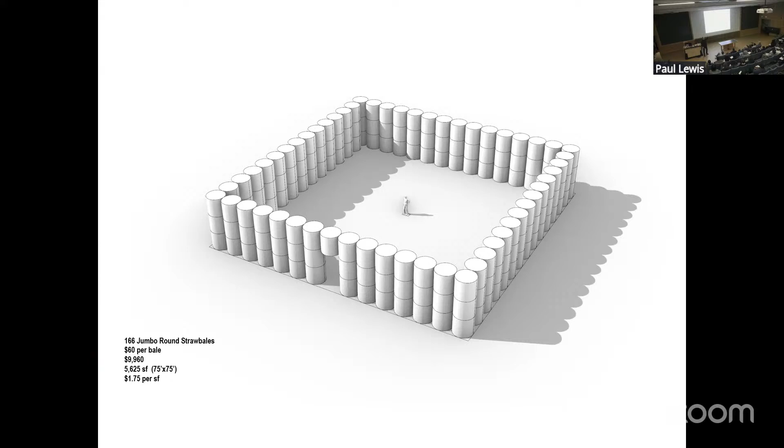So the idea that you could, granted you're not getting your floors yet, but you're getting walls relatively inexpensively has some appeal, but more intriguing from an architectural standpoint is what happens when this starts to be a different way to imagine how you could think about the building. Rather than just positioning your straw bale around the periphery, you start looking at different ways to carve the space. That the exterior and the interior could be fundamentally different. We could design through removal as much as we do through addition.

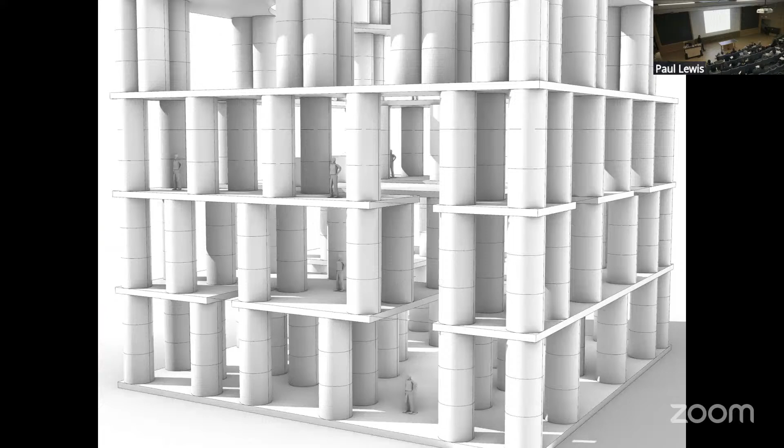The thickness and difference within the architectural poche could now become part of the argument without incurring huge amounts of expense, and in the process sequestering a large amount of straw. It becomes really interesting to think how this abundance of straw could be useful here, combined with CLT floor systems, how one could start to design through removal, just simply a diagram of what the architectural possibilities might be.

And the cladding is not that complicated, right? One can look at a membrane and then a rain screen on the outside and a cladding on the inside and a CLT ring beam at the top and the bottom. These bales, even though they're round, by the time you squish them together, you're going to get a minimum of 30 inches of straw, which gives you an R value of roughly 50, which is not bad.

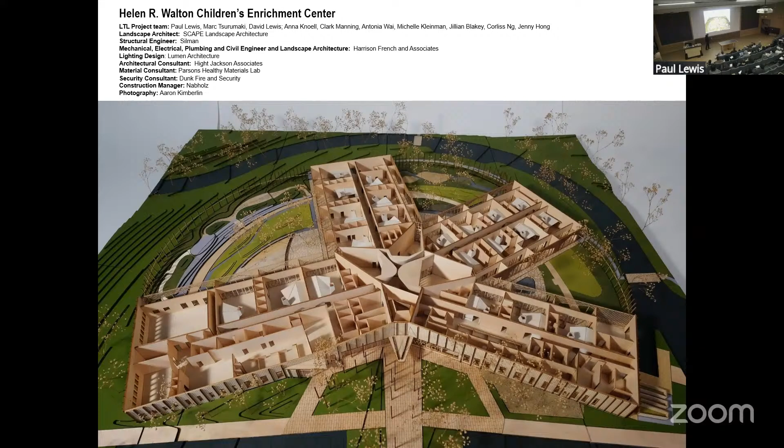So our question was then, all right, can we look at an existing building we built and rethink it as a straw bale structure? So this was an early childhood education building in Bentonville, Arkansas, about 40,000 square feet, 240 students, very young age to age 5. They were each organized in classrooms that then connected to an outside space or play space that was relevant to the age group. So the older kids would be here and the younger kids would be here.

So each of these 6 or 7 classrooms would all have a collective play space. There would always be this large exterior porch for every one of the classrooms. So even if it rains, you can go outside. And then the interior was framed by this felt roof. For us, what made this project interesting was that it had no plastics. There was no latex paint. It was all mineral-based paint.

This is a collaboration with Parsons Healthy Materials Lab. There were no plastic toys. There was no grout. In a sense, we got rid of any VOCs within the project at all. But it was made out of conventional materials, drywall, metal studs, et cetera. We tried to do a lot with the drywall. We tried to carve it into these kind of sculptural spaces. It was $180 a square foot, so not an expensive building.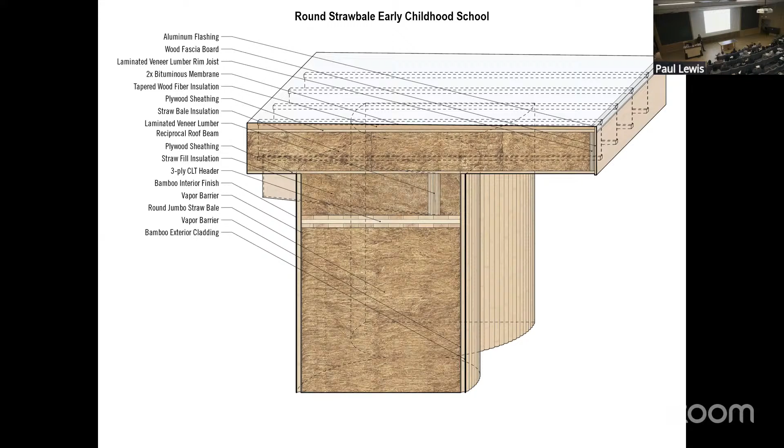And so we wanted to return to this to say, all right, what would happen if you imagined it now being built out of jumbo straw bales? Tectonically, it became really interesting. We could imagine the classrooms in this case being framed by these straw bales with a reciprocal frame roof, a wood roof that would form a skylight in the middle. So each of the classrooms would form these circles. The walls were sufficiently thick that you could start to carve out play spaces within the walls themselves.

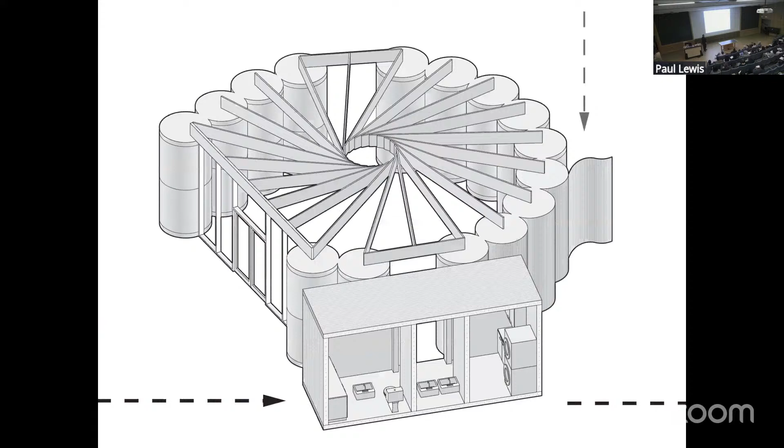You could get the bales to go outside and actually become part of the landscape, the play spaces out here. And working with CLT, we could get prefabricated bathrooms in between each of the classrooms. And in a sense, we would get this project that would allow us to keep the similar argument about self-similar age groups having play spaces, but then coordinating into a collective.

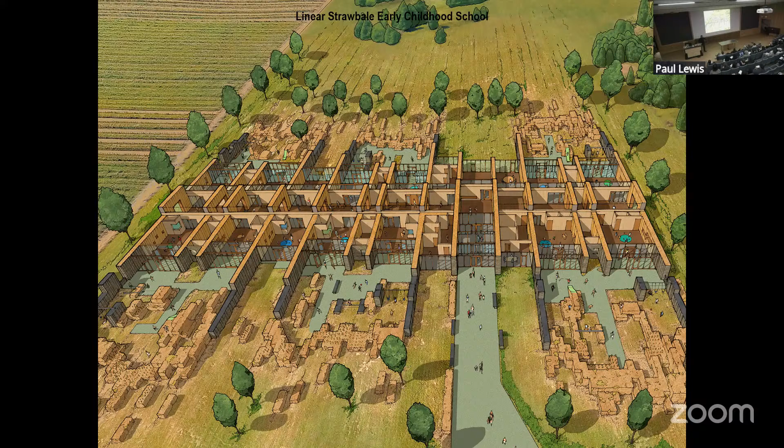It was not our intention to make a heart-shaped plan. It just happened. That's what happens when you start following the material logic. You end up with forms that are Instagrammable, which is great. And just to be clear, this was our round bale version. We did the same thing with rectilinear bales, and not surprisingly, we ended up with a much more rectilinear project. Similar argument in terms of program.

Okay. So the last thing I want to present is some experiments that we've been working on in trying to develop a structural installation using straw. And the real problem here is binder. The argument is that if you can compress straw sufficiently, it can actually be load bearing in a way that regular straw bales aren't. Most straw bales are compressed to about, I don't know, 80 to 100 kilograms per meter cube. We were trying to get closer to double that, like 180 kilograms per meter cube. So it could actually be a load-bearing installation, which is kind of the holy grail, right?

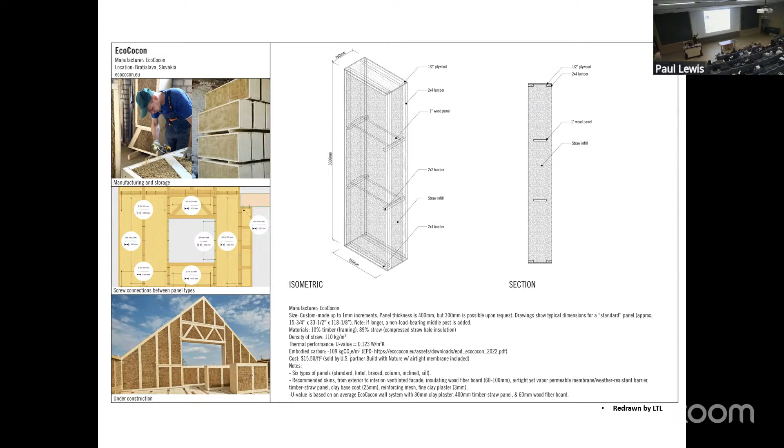There are a lot of products available. Some of them are amazing, EcoCocon or Croft out of Maine. These are available straw panel systems that are using double stud 2x to make roughly 8 foot high by, say, 40-inch wide and roughly 12 to 14-inch deep panels that use straw, whether it's compressed straw or straw bales, as the insulation, but it doesn't deal with the problem of structural straw and lets the wood play that role, which makes sense in terms of getting it into code, getting contractors to build with it, et cetera.

And even New Frameworks out of Vermont will actually teach you how to do this. They have a program to mentor other contractors to make straw panel systems. They have a whole kind of class set up to make this possible. The idea of developing a whole series of locally based straw panel companies is great. So we're all completely supportive of this. In fact, we're using one of these products in a project we're building this summer.

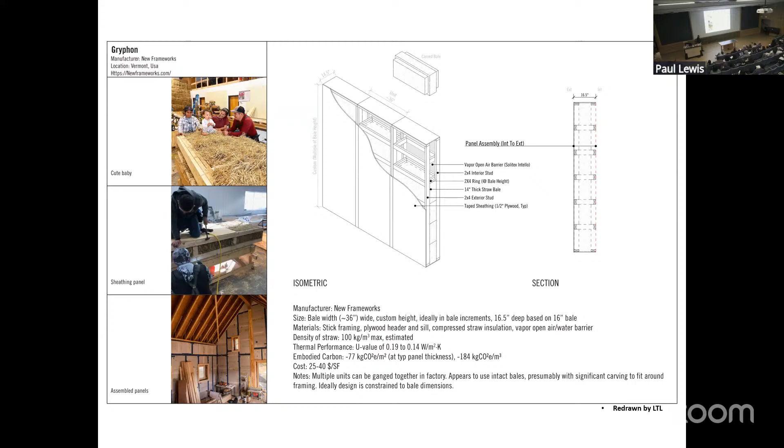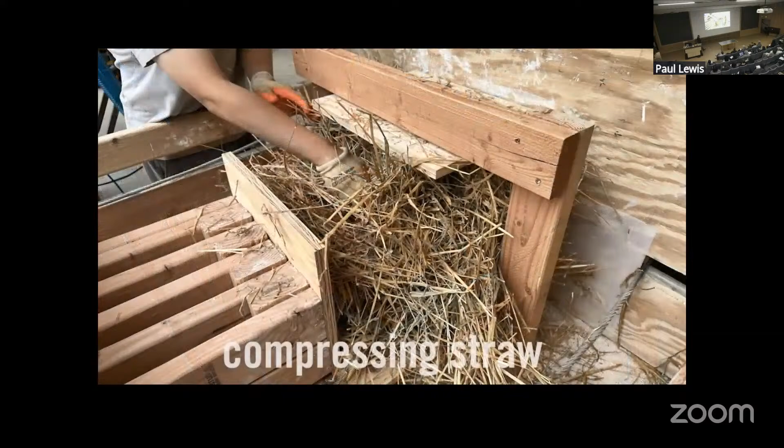That being said, we were really interested in whether we could actually work with binders and compression to get straw to hold to itself to make a form that would do that. So the binder was key. So how could we work with earth or limes or mycelium? We invented a compression machine inspired by Croft out of Maine to try to compress straw to get the density that we wanted. We were kind of making a whole series of these test blocks.

There's about 24,000 pounds of force being used to compress the straw into these molds. One of the problems is it takes a while for these things to dry, so the molds had to be kind of openable, to unbox them. We had our units, and then we kind of ran them on a series of compression machines.

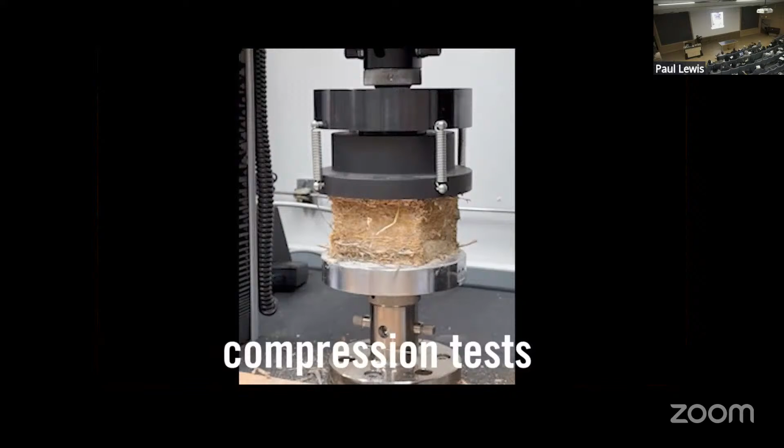We also found it's enjoyable to give straw a haircut. It makes a beautiful surface, by the way, so really gorgeous. That's the compression level that we were able to get with a kind of SIP system. But to be able to then test these, we cut them up and then placed them in an Instron machine at Princeton. And you can see it has no deformation horizontally, and it bounces back. It's able to take on increasing loads, but the downside is it's still super squishy.

We also looked at thermally testing this to see what R values we could get. And to be honest, the answers we've been getting are too good. So this was some experiments we did in 2023. Go through these a little more slowly: the compression machine, the straw being compressed into these volumes, trying to work with different binders.

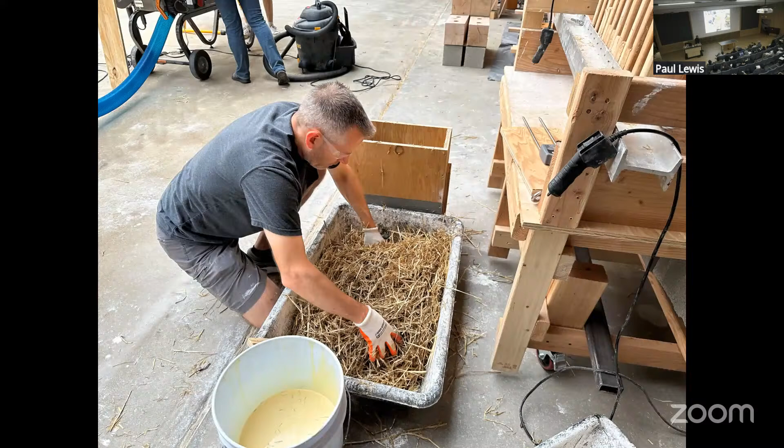A couple of things just to note is that some binders form their own skin so that they don't dry out on the inside. So if you use a wood glue, which is not great to begin with, it'll form a skin so that the inside doesn't dry. So it rots. So that's a problem. Mycelium was a disaster, even though I would love it to work, mostly because it's so dense, it doesn't grow into the depth of it. So it only forms a kind of shell of mycelium around the outer inch within the compression system.

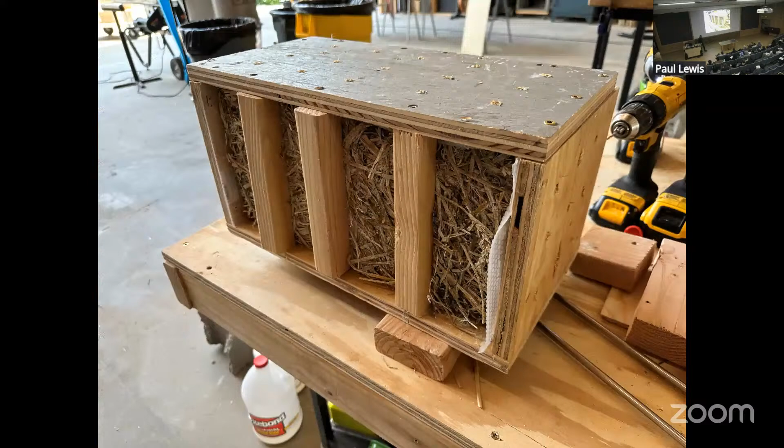Here are some examples of the mycelium. Our most success came with lime, and lime is not great, right? And it's not a lot of fun to work with. And so we've struggled to get a perfect solution from these particular binders.

To be honest, we're kind of more interested in possibly getting rid of binders altogether and developing a SIP, or a structurally insulated panel, where the straw is compressed inside skins, whether they're plywood or OSB, and they may be stitched across to each other to form a kind of stable unit where the straw would still play a structural role. And again, with the difficulty of the rebound, we still need to find a way to get that compression to really hold. It's not quite there yet.

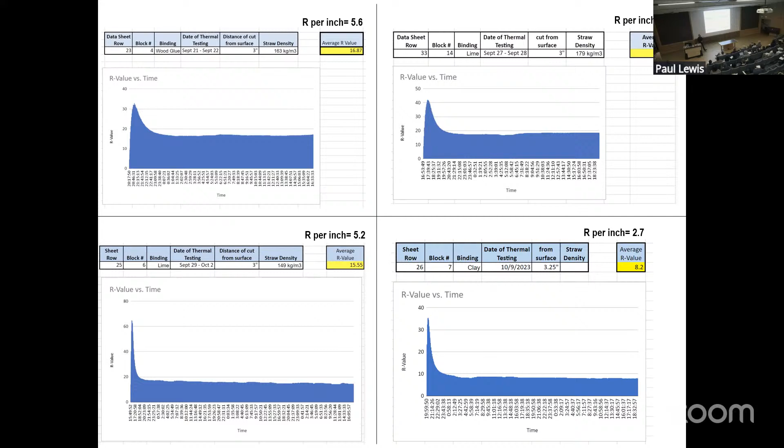And the R value, the biggest problem here is that when we set up the sensor, it's very hard to get a proper read on the surface of the straw. Even if we embed the sensor in the middle of the straw, have heat on the insides, and we bring it to a steady state, we're getting R values that are just too good to be true, right? It can't be R6 per inch. And I think it's because it's moving around the sensor in a way that's not getting a proper setup. So we're looking at other models to test this.

That being said, the exhibition is an opportunity for us to present some of this material in a different format. Just by way of explanation, the exhibition really has three components. On the outside of the exhibition, we've, in a sense, unfolded the book into the space of the gallery. So each of these stands holds one book open to a particular project, with other images of that project placed above. So in a sense, we like the idea that the book and the exhibition become one and the same.

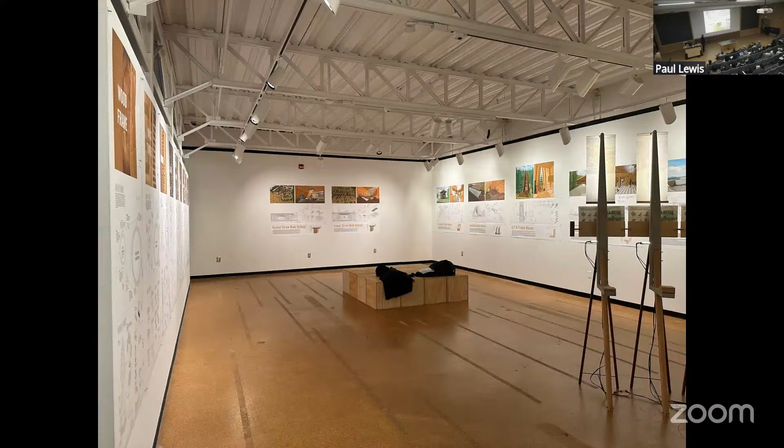On the inside, we've located a series of materials that go from most carbon sequestering on this side of the circle, or the amoeba, to the most carbon emitting over here. And the rough quantity of carbon is identified on the plaques there. And then the third component is the series of projects, some of which I've been describing, that exist on the wall.

And so I will say that we're particularly energized by the agency that different materials bring to architects. It allows us to do different things. It's not going to be easy, but it's super fascinating, and frankly, it's the right way forward. And in a sense, it can be a kind of paradigm shift for a different model of architecture that hopefully all of you will engage in.